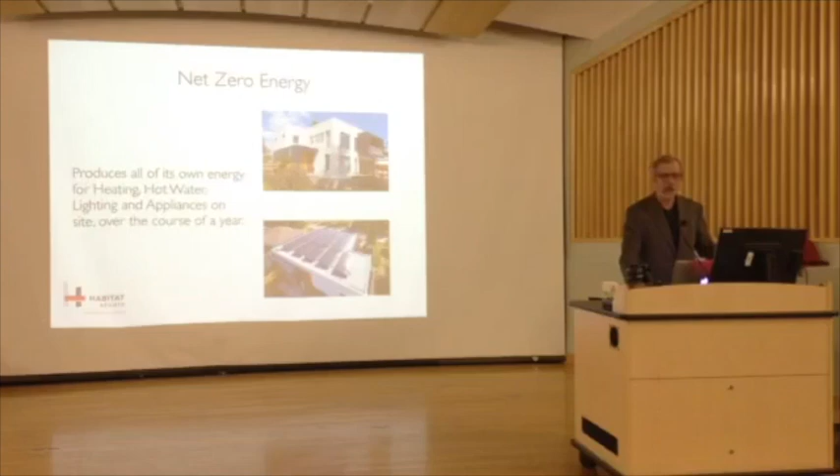Heating, cooling, appliances, everything over the course of the year on site. That means they produce energy in the summer when the sun is shining on the solar panels, and well, all year, most of the year anyway, and in the winter they're drawing it back out of the grid. The amount that they export and the amount that they import is about the same. As Rob said, we've done 11 of them so far.

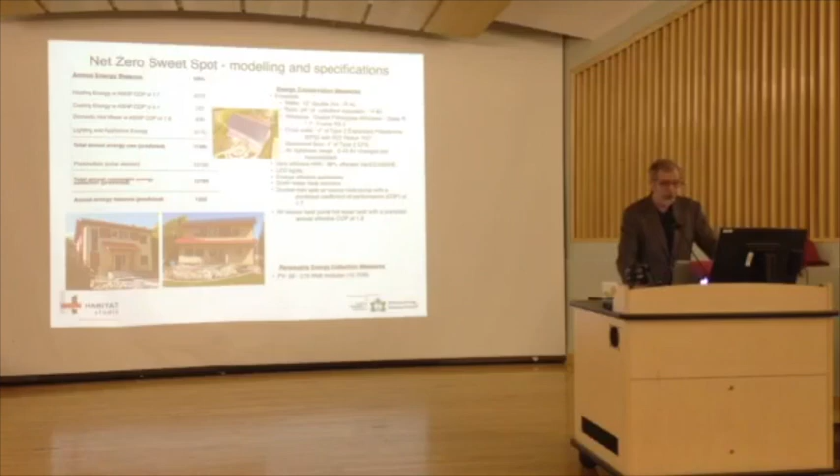Starting with this one that we built with Natural Resources Canada under their R2000 net zero pilot, it's producing a nice surplus. We think we've replicated that. We think we now have the recipe. So it's something like this.

It's an R40 wall. Does everybody here know what an R value is? Like when we say R values, anybody? I don't need to explain that. Okay.

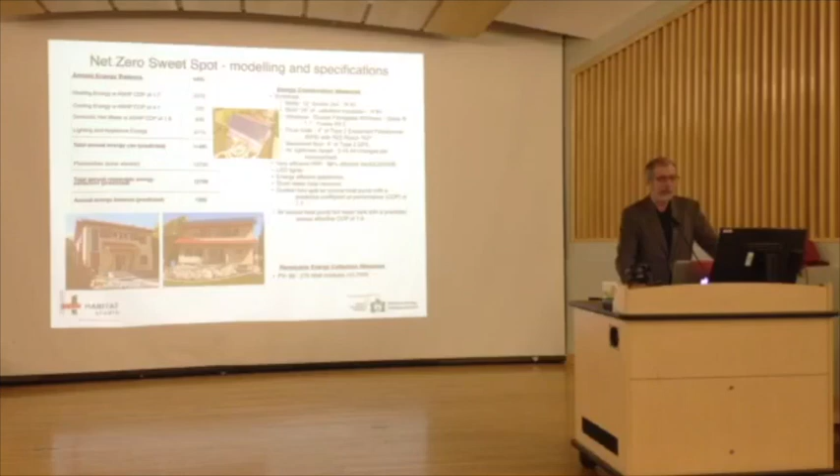So the recipe is an R40 wall, double 2x4, R80 roof, R37 frost walls, continuous insulation, about R16 under the basement slab, really good windows, and an air source heat pump and air source heat pump hot water tanks. We'll talk about that a little bit more.

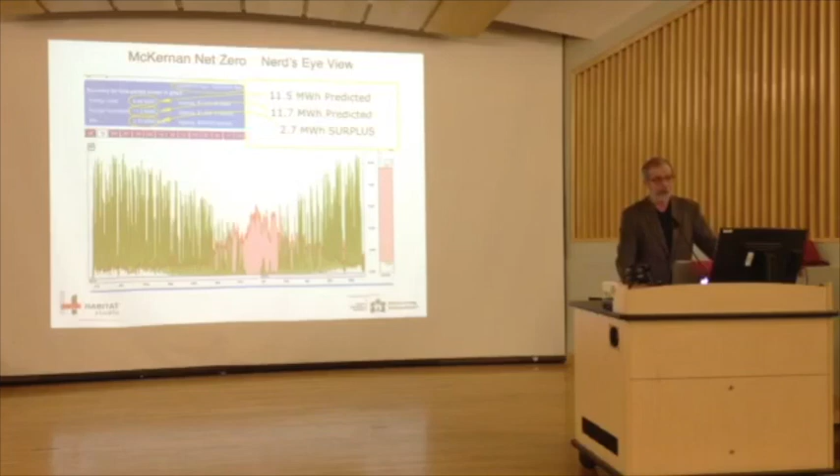And we now have 2 more that are using the same recipe that are net positive. So we're really confident that this is it, we've got it now. We can do this pretty much anywhere. So that's just a little bit of bragging.

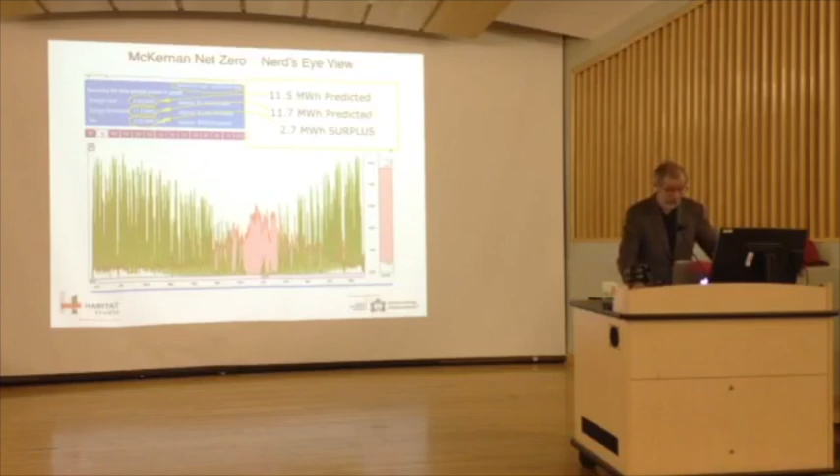Really, we're here to talk about this project in North Glenora. Rob was talking about a community - this is a community effort. The number of pieces that came together to make this happen is really quite amazing. So we started with...

...the neighborhood of North Glenora. It's a vibrant neighborhood, it's across the street. Our site was an old church hall and manse across the street from the school and the sort of big block - great solar exposure. The neighborhood has got lots of renovation going on, it's a kind of a, property values are going up, there's lots of new houses as well. But the school population was low, and the school was under threat of closure or consolidation with another bigger school somewhere else.

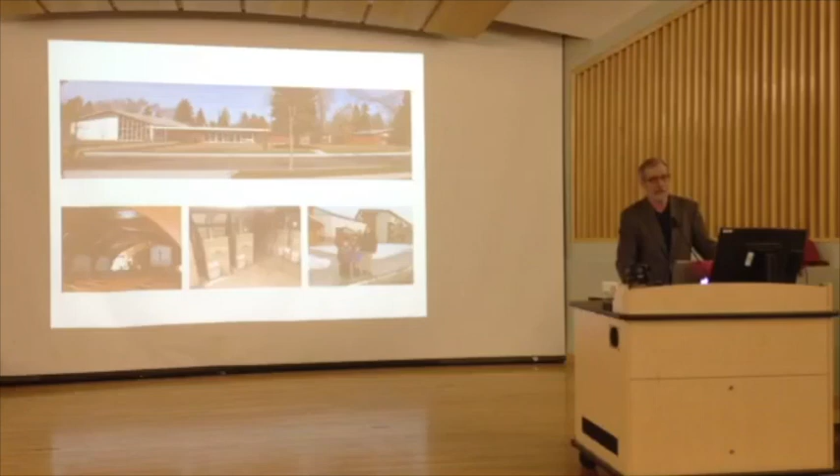So the congregation had 2 problems. One was even with the 7 furnaces, when it was cold, it was uncomfortable, and people are aging and have less tolerance for cold, and they couldn't afford it. The other thing was that they were looking after a family from Myanmar in the manse, with 5 kids - it's a 3-generation family, the parents live there as well. They found out through that how desperate the need for housing for large immigrant families is. So they set out to solve 2 problems.

They contacted the Right at Home Housing Society. It's a nonprofit housing society that's been building and operating housing in the inner city for about 40 years, and talked to them about how they could do something together, and Right at Home engaged us. I had been involved with them years ago - I was at their founding meeting, and in fact it's through them that I'm a partner in Habitat Studio. Ultimately, that's another story though.

So we started to design a project and we engaged with the community, and there were all the usual concerns like parking and traffic, and a little bit of NIMBY pushback, but the consultation was done really well. The community league president was very helpful, and it's a good bunch of people - like these folks are pretty woke, really. At the end of the day we went to council, and we also listened - we changed a number of things.

They wanted to be sure there was a space for a daycare - that was a big concern in the neighborhood. They also wanted to be sure the church was on the same corner it had always been on. So we listened, we did that, and we responded to the parking and traffic stuff as much as we could. At the end of the consultation process, the only people in the room at the council hearing were the community league president and the planning chair, and I was blushing - they were so effusive in their praise for the process and the project. So we had our zoning in 5 minutes, and Scott McKeen just about fell off his chair.

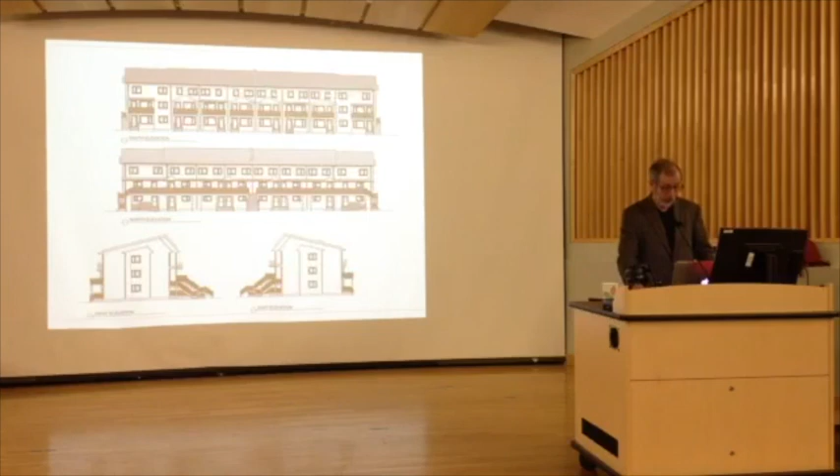So it's a stacked townhouse project - there are 16 units altogether, 4 5-bedroom units, and 12 3-bedroom units. The units are stacked on top of each other. The lower units have their bedrooms in the basement, and the upper units have their bedrooms on the 3rd floor, and the access to the upper units is via that bridge that you sort of see at the top.

They need all that space. In fact, when we originally met some of the families there back in the summer, there was one family looking for 2 units.

The 3-bedroom units have bigger bedrooms, so that the kids' bedrooms are big enough that you could have 2 in them, and lots of them do.

So from the outside, it looks like this. We tried to give this feeling of a pattern of a family of entrances, so that it was oriented to the street and just had a really good residential feel, being a fairly large building.

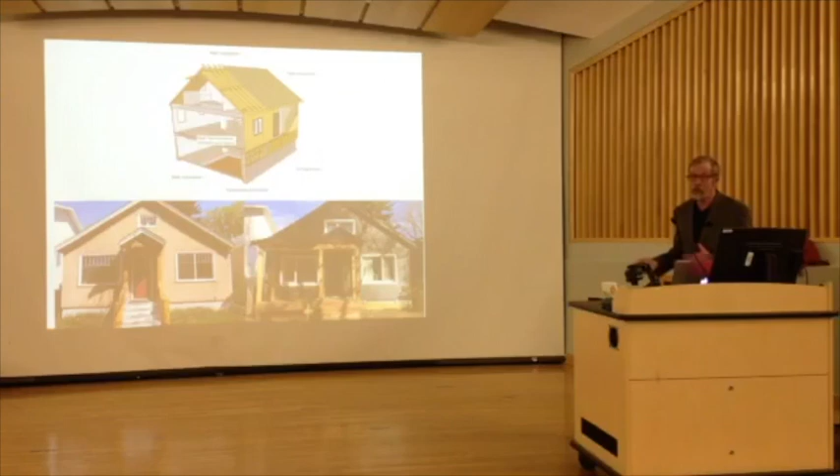With this deep energy retrofit, we've got to do this. But this is kind of what we have to do, and we've got to do neighborhoods of this too.

I wish I had a picture of Calgary, because the way Calgary's laid out, when you drive through on the Stoney Trail, it's like there are billions of houses in Calgary. You see them all because the hills roll up and show them to you. That was the closest I could get for Edmonton.

But we've got to fix those, and they're only like 20 years old, so the windows don't need replacing yet, nor probably does the siding. And we've got to fix all the old ones downtown. And we've got to fix these ones that aren't even finished.

So just to go back to that, taking you through it: somehow we're gonna do this. We're gonna start taking the buildings we have built today and start retrofitting them, and there's some hopeful possibilities in that regard. I'm assuming we're gonna start ramping up net zero buildings really fast, and that from 2030 on, that's all we're building, so we're not adding any more to that. But then somehow we're going to have to fix these ones we just built and are still building. I have no answers for that.

So that's all why we need to build houses like this right now, because we just cannot add to that list. That's too much work already.

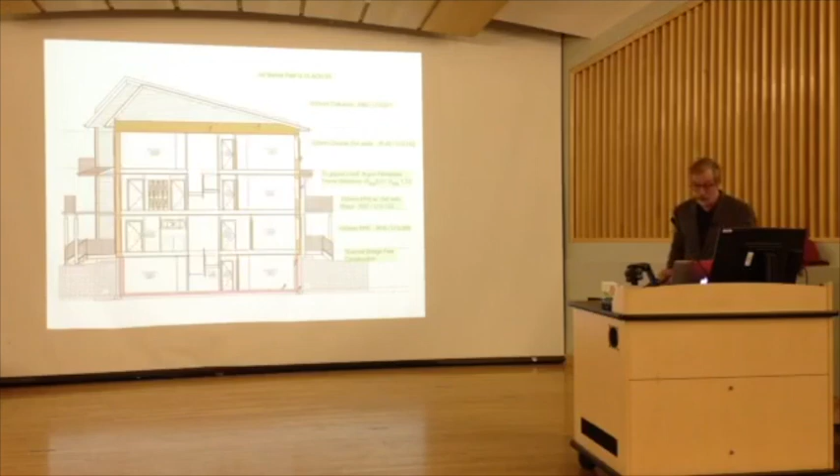And so now I'll take you through just a little bit about how we put this together and the attention that got put to various details.

We've got thermal bridge-free construction, so there are no places in the entire envelope where there's anything but insulation between you and the outside. Anytime we've got any sort of structure, there's a few little bits of subfloor and that sort of thing, but for the most part there's almost no thermal bridging there.

These footings down here, where the dividing walls and party walls are going to go, are actually wood boxes with insulation in them. So when we put the insulation under the slab, they'll butt into that and it'll be completely continuous. The insulation on the floor butts right into this insulation here, and that goes up, gets filled in, and gets continuous with the walls above. So it's pretty much thermal bridge-free construction.

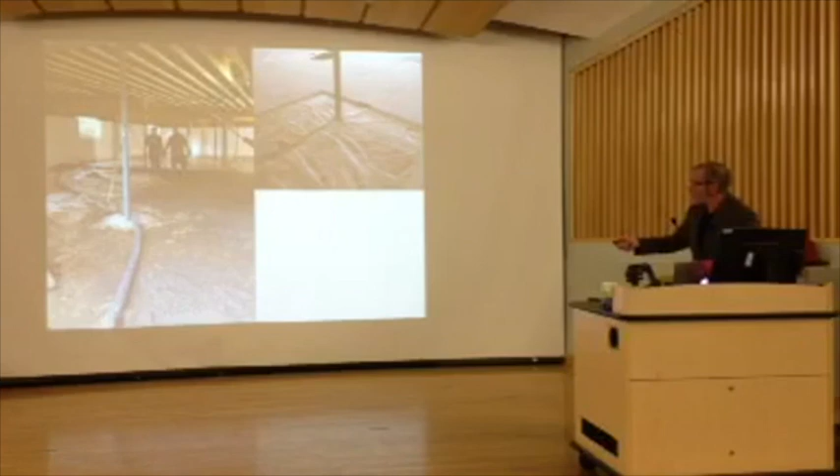You can see here we've got 2 layers of styrofoam under the basement floor. We've got poly, like a poly air barrier, in between those 2 layers, so that's sealed. That gets wrapped up the wall here so it can tie into the other wall poly eventually. So it's continuous airtightness, with lots of care and attention on the detail.

Because we delayed the framer so long, he actually prefabbed the walls in Red Deer, and that worked out quite well. It meant he wasn't taking up space on site, and we were able to do other things. He brought up about 5 truckloads of walls - they add up pretty fast when they're 12 inches thick. So while we were building away on the church, he was dropping this stuff off and getting ready - there's a wall panel there being swung into place.

It's our typical 12-inch double wall - 2x4 inside, 2x4 outside, and a gusset to hold them together so the pressure of the styrofoam doesn't push them apart. We also get a lot of extra strength. This building was built with double 2x4s on 2-foot centers, even on the walls that had 3 stories above them and carried the roof. So it's very, very economical.

And our usual fussy poly details - I'll talk about that a little more in a sec - but the same kind of thing where we back up all of our joints with polyethylene and tape stuff and lots of acoustical sealant. It's a recipe that's been working very well for us on our single-family houses. We're aiming for an air tightness of 0.6 air changes an hour.

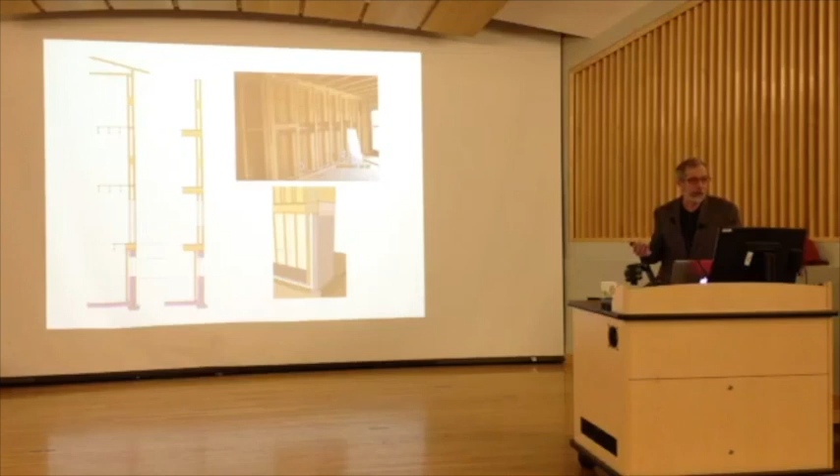One of the places where I think we're getting leaking is actually this spot right here. When we went around with a smoke pencil, we could find it leaking there. That would have been easy to seal. Our insulating guy who was doing that sealing didn't understand that, and by the time we were testing it, we had flooring in a lot of these places, so it was hard to get down there to really do much. We did the best we could to fix that, but what a lesson.

We get way better results than this on our houses, and we should have gotten a better result here, because the ratio of external area to floor area is so much lower that it should be easier to hit the target. In fact, the U.S. Passive House standard recognizes that, and they make you measure leakage per square foot, which at this size of building turns out to be about the same. But as buildings get bigger, you have to get them tighter.

There's a couple reasons for wanting that tightness: any air that's leaking out has got humidity in it, and as it's going out, it's reaching a point in the building where it can be almost as cold as outside. As it travels out through that crack, it cools down, and as it cools it drops the moisture - you can get frost, and actually quite a buildup. So it's not just an energy issue, it's a durability issue as well. But we've got a safety margin here with the cellulose, because it's continuous through the whole thing, and if you get a little concentration of moisture in there, it acts like a giant sponge - it wicks it throughout the mass where it's pretty much harmless and can diffuse slowly out the rest.

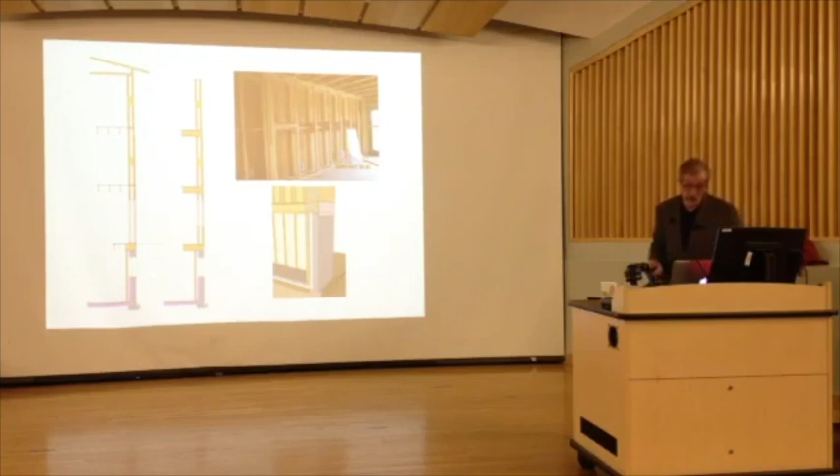We also recycled a bunch of wood - all of the wood in the church actually is reprocessed. We built the front doors from it. We took leftover glulam arches and made that nice welcoming entry canopy. The front doors are like 4 inches thick, triple weather stripped, with R12 insulation in them. We tried to make passive house doors - that was kind of a vanity thing, just a weekend project.

But we're still fiddling with the automatic opener with the 3 layers of weather stripping.

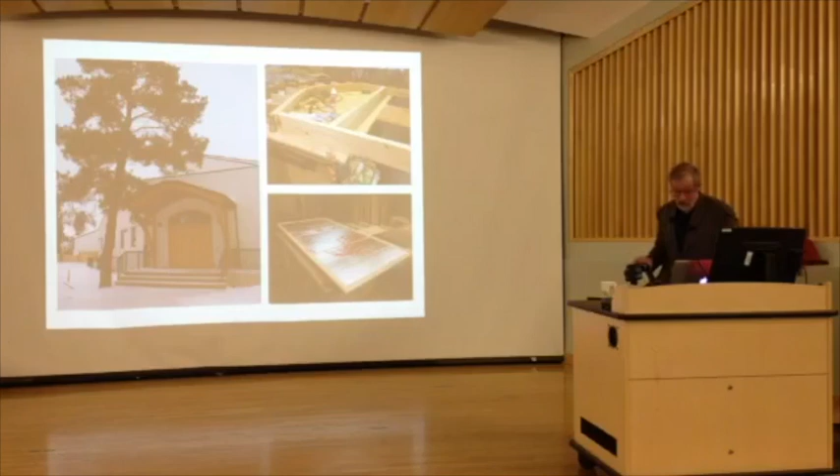For the same reasons people worry about long-term costs, we were really careful about making the building durable and low maintenance. The siding is Hardie siding, and we used building paper so that it would be vapor open, so any moisture that does get in the wall can dry through it - it's better than Tyvek in that regard. We've got rain screen battens, so there's an air space behind the siding, so the walls can dry if they ever get wet from either side. We're actually doing this on all of our projects now - it's not that hard, and it's required in BC and on the coast.

Then there are other little details - we have these timber balconies. We were very careful about how we flashed them, because wood will last forever if it can dry. So we've got no places that can really trap moisture, and when they do get wet, they'll dry quickly and hopefully maintain that.

We did a kind of cool thing with the balconies here - these are precast concrete planks that we made ourselves, made while we were waiting for the geothermal drilling and some of the other stuff to happen. So we've got our structure, our wear layer, and our waterproofing all in one piece. That's really tough.

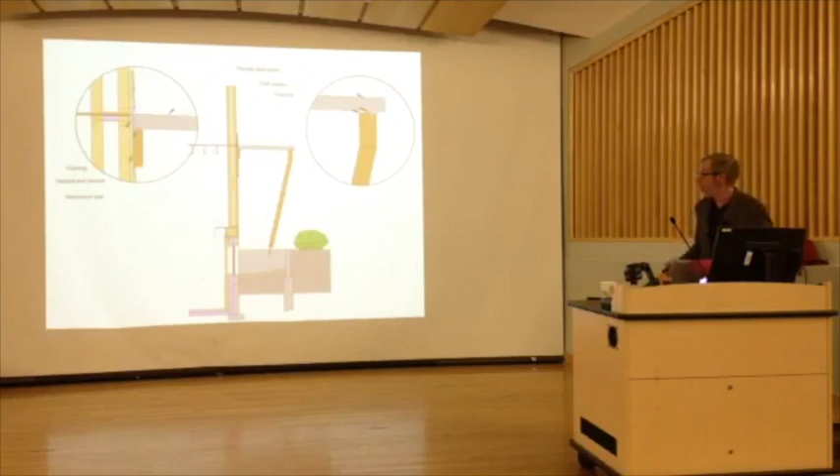I told you we just used our recipe on this building. Was it the right thing to do or not?

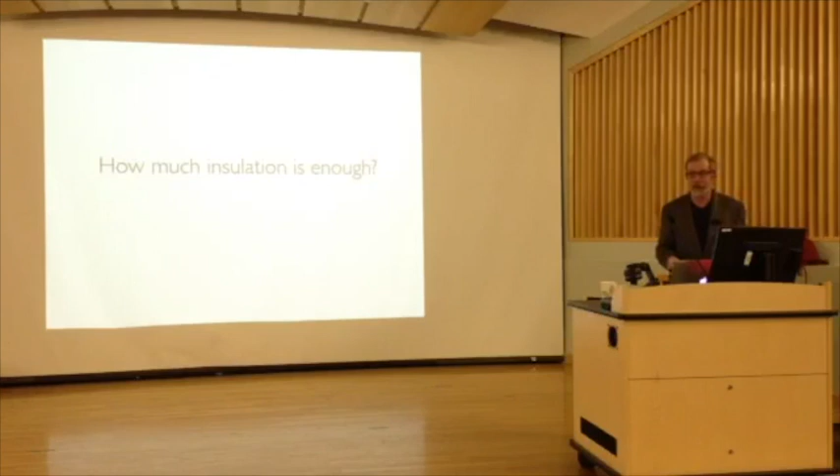When you're trying to figure out how much insulation is enough, the way you go about it is to figure out how much it's costing to add more, and how many kilowatt hours per year you're saving with that extra money. So you can always reduce that decision to that.

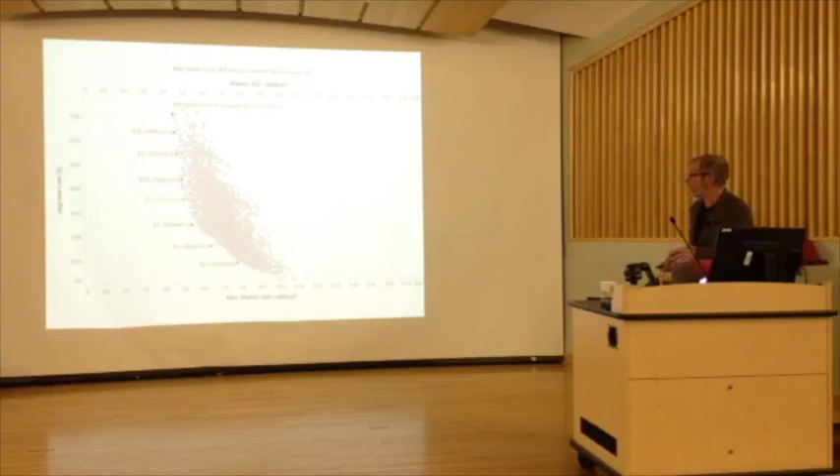I'll give you an example here. This is some work that Natural Resources Canada did with a database program called Tableau, I think, where every point is a solution that's a cost for an upgrade, and on the bottom it shows how much energy per square meter that building is using. So obviously you're going to do the cheap ones first and then go up the chain, and that's really what drives these kinds of decisions.

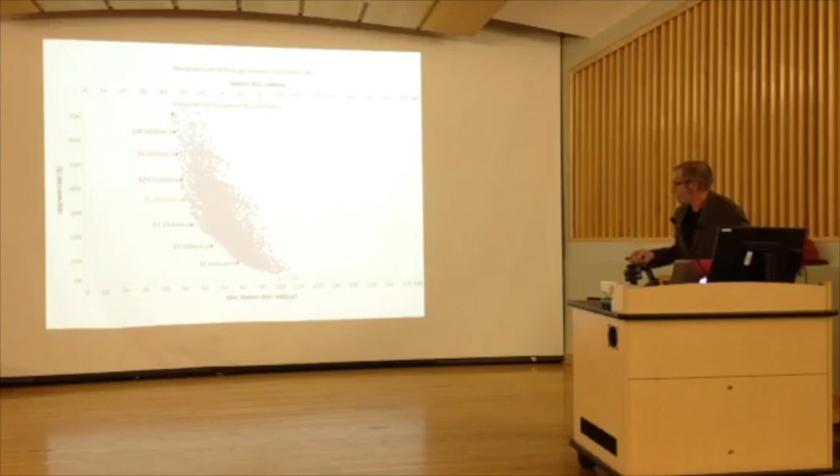So for example, this is looking at the cost of the insulation under the basement slab in the church. We started with R16, and that's where we stopped.

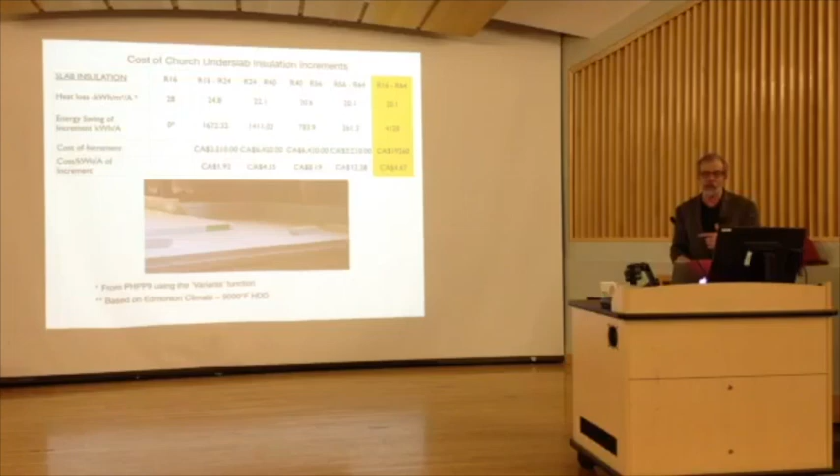Then we said, because we were academically interested, what would it take to take this building to the International Passive House Standard or the U.S. Passive House Standard? The two standards are different. The U.S. one is climate specific, and these buildings meet it easily. The international standard we don't meet, but I was interested to know what it would cost us to do that.

So just looking at that, we started with R16, and all these numbers come out of the software that is required for testing passive house compliance. It's called PHPP. It's a humongous Excel spreadsheet.

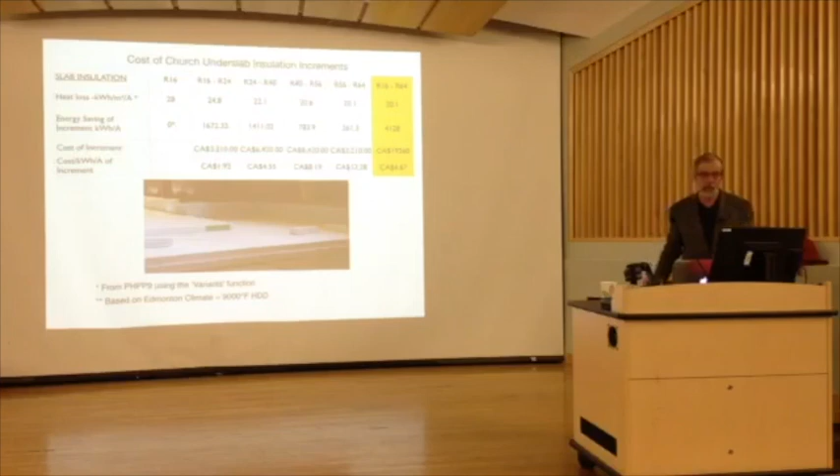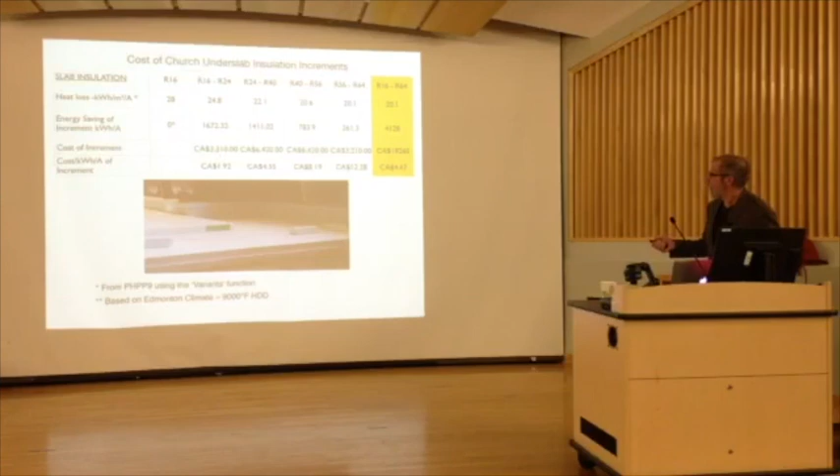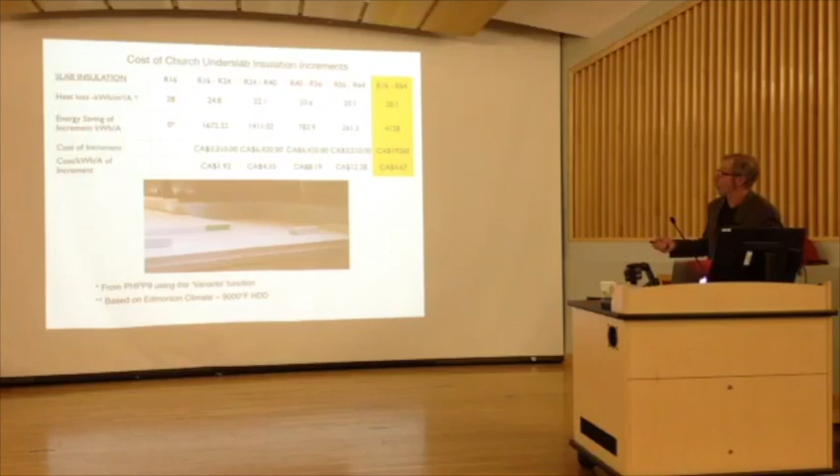So if we were to go from R16 to R24, that's just another 2 inches. The building would go from 28 kilowatt hours per square meter per year down to 24. We'd save a total of about 1,600 kilowatt hours a year, and it would cost us about $3,200, at a cost for that measure of $1.92 per kilowatt hour, which is not bad.

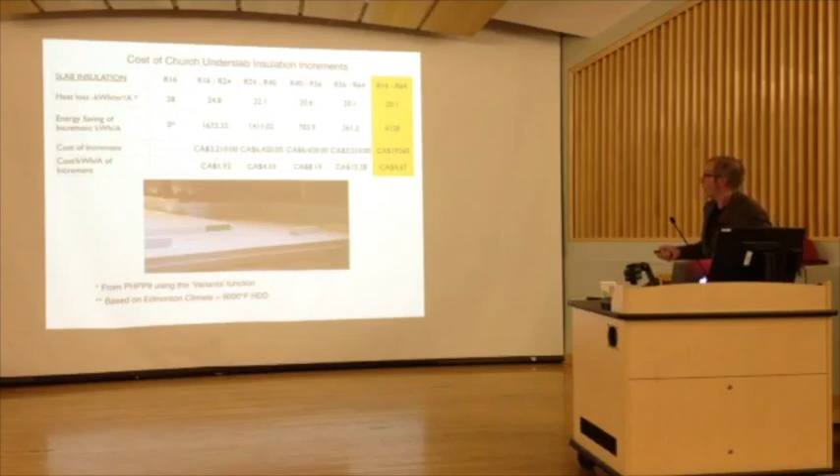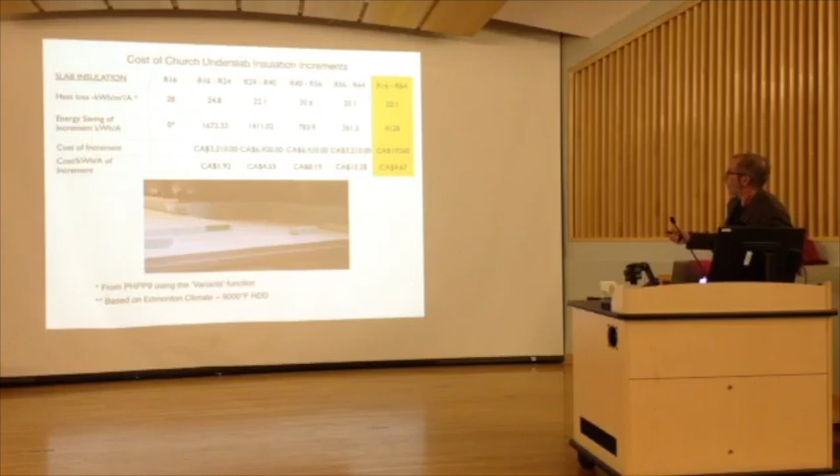That's reasonable. But as we go up, we kept dialing it up to try to get to compliance, and we had to go all the way up to R64 under the basement slab to get it to passive house compliance, and the last step was going to cost us $12.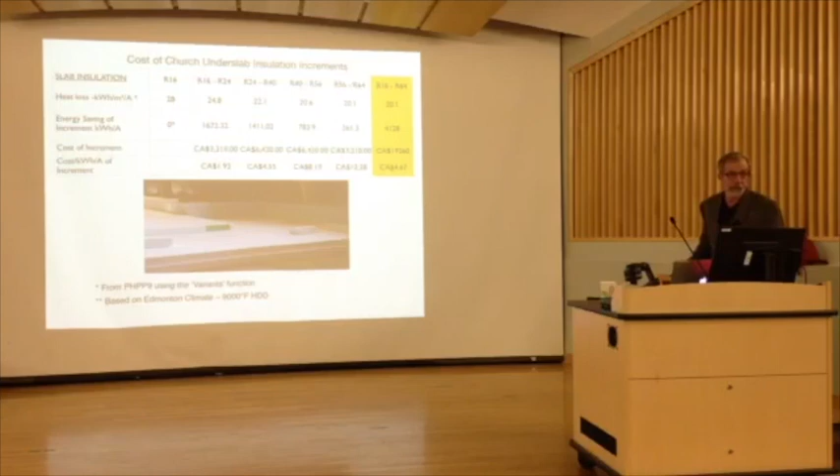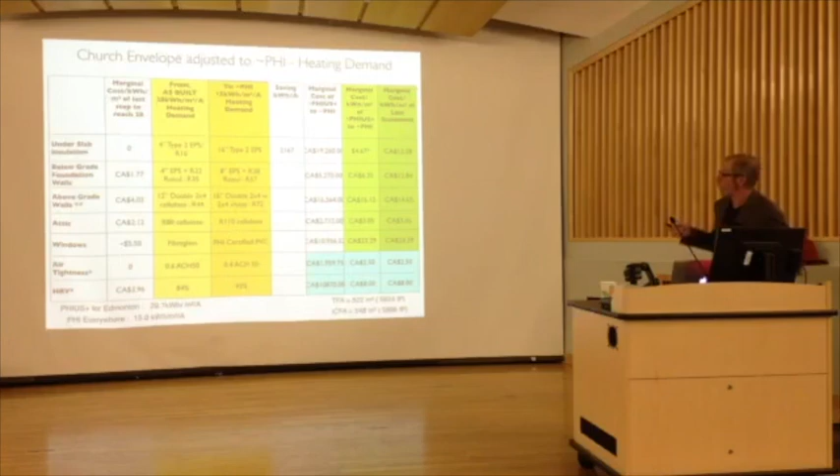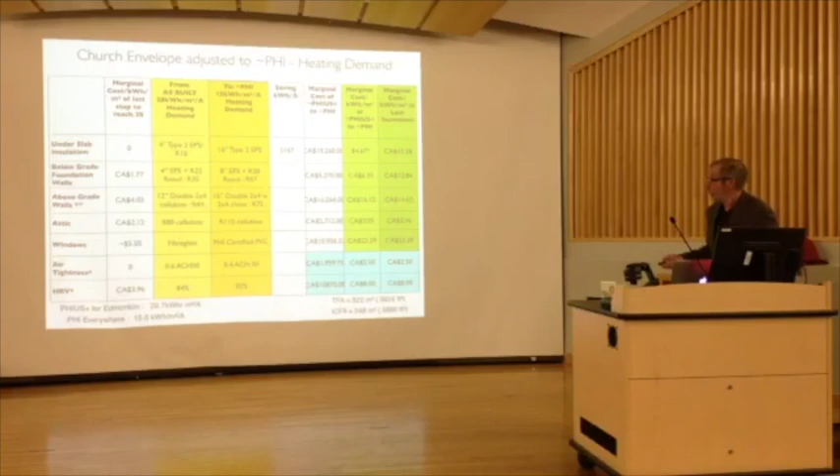And we did that for the whole envelope. So this column here is where we started and what it costs to get to the step that we stopped at. You can see we're in the range of $1.77 for the slab, about $4 for the walls, $2 for the attic—that's always going to be an easy one—and $5.50 on the windows.

Windows are expensive. And then to get a good HRV is about, for every kilowatt hour a year it saves, about $4. You've got to do it, so it's not optional, and airtightness we were just going to go there. You can see I still have my optimistic number in here.

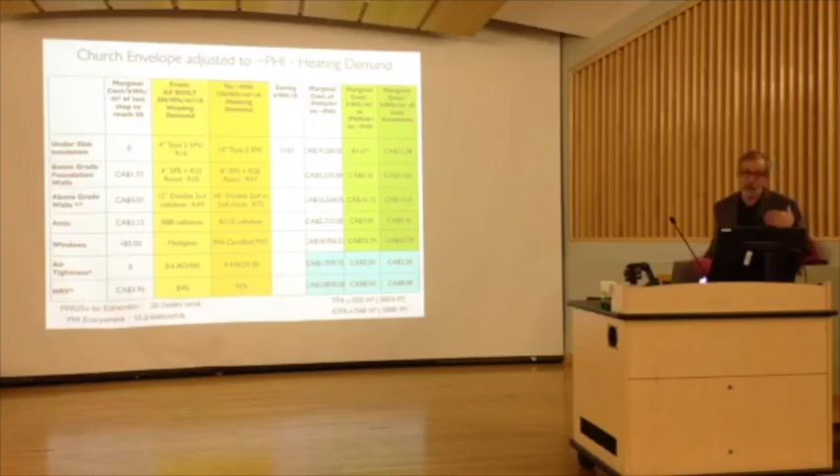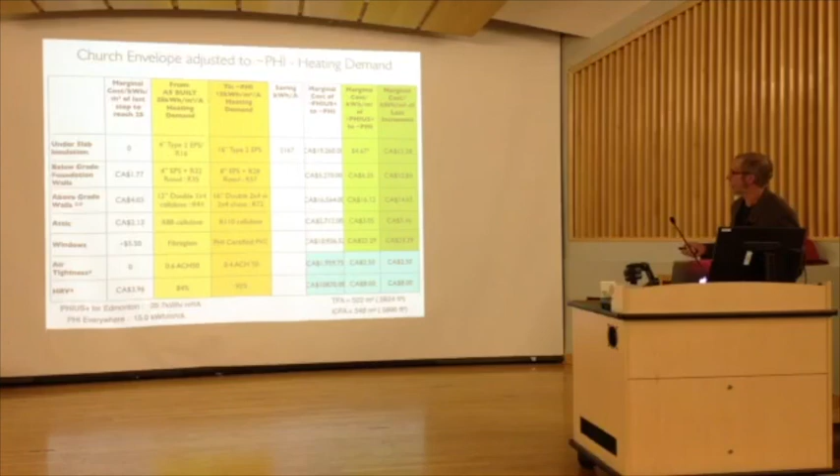So then we dialed up the specs to get that building compliant to the International Passive House Standard. So we had to go up to— is that right? I think that's a typo. Yeah, it says EPS, I did this a little while ago. No, that should say whatever I had on the last sheet there. Yeah, no, that is 16 inches. It's insane.

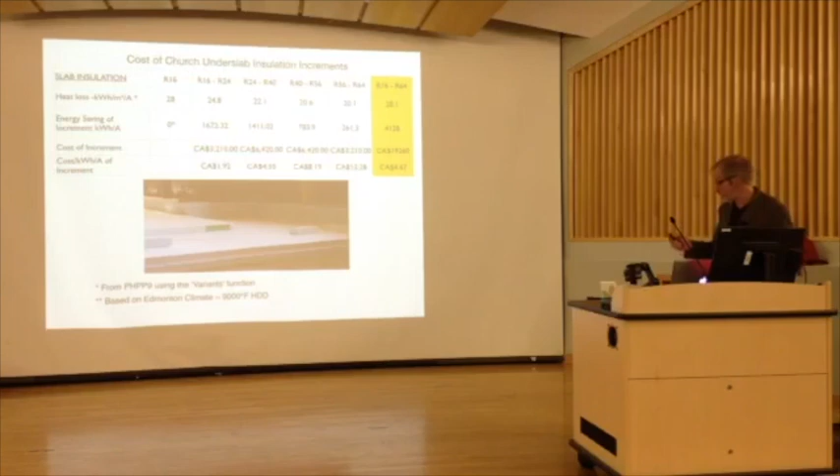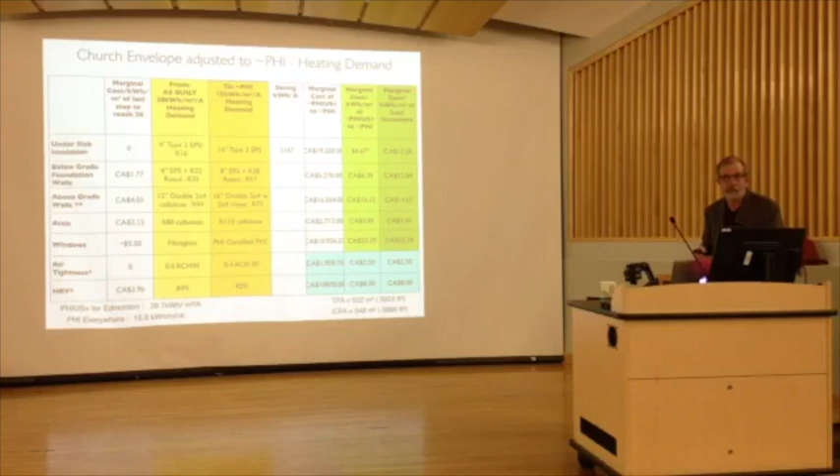Well, the difference between PHPP—one of the differences—and the modeling software we use is that it's a static calculation, and that's not how it works in the ground. HOT 2000, our more commonly used software, actually uses dynamic calculation to do it. But anyway.

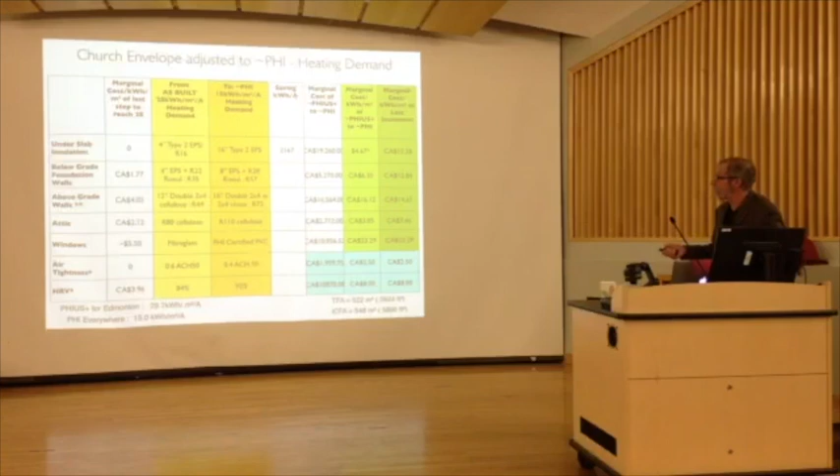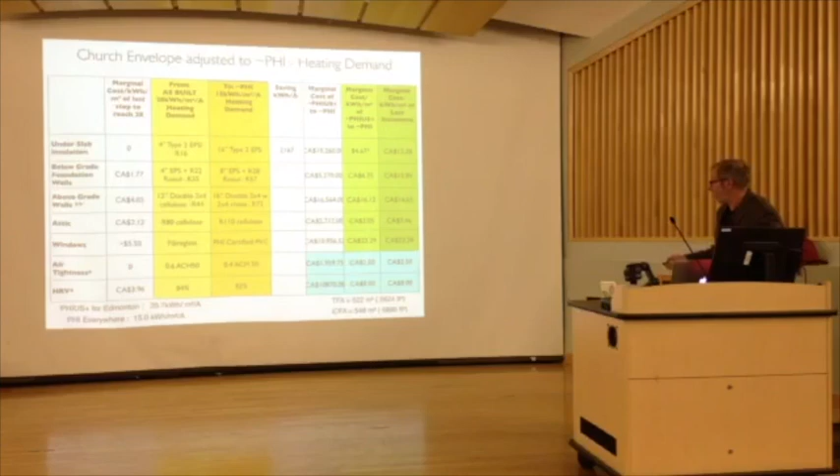So then we were upping the basement frost walls to R57. Our walls went up to R72, so we had basically a 20-inch wall, R110 in the attic, certified passive house windows, and they're costing like $23 over the ones that we used. You can see these numbers are getting pretty big, and that's really why we didn't do it.

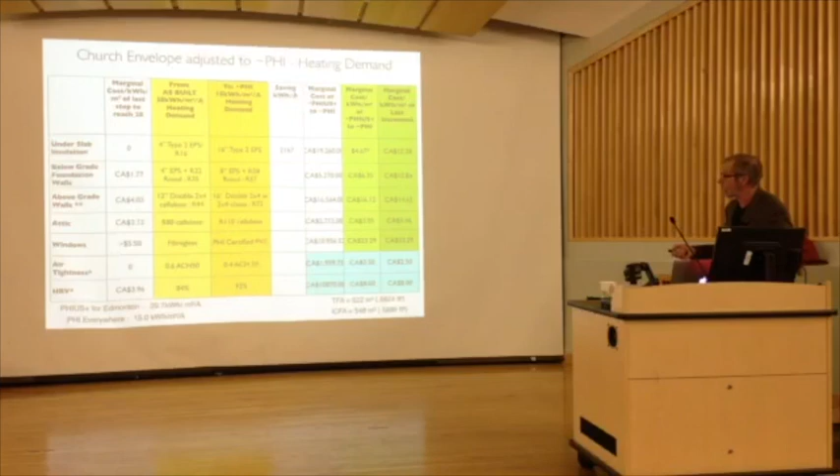And the total savings were not that big. We assumed, optimistically—and I think we could have done it, like building with an inside double wall with a 2x4 chase—we could have gotten it to 0.2 or 0.4. I'm pretty confident of that.

So all this—I looked at this, and this building, as we built it, the church, is using about 28 kilowatt hours per square meter. It meets the U.S. Passive House Standard. It's a darn good building. It's net zero energy. The townhouses with exactly the same envelope are at 15.3—they're a whisker from passive house compliance.

But a square foot of insulation in the townhouse is doing exactly the same job as a square foot of insulation in the church. It's stopping just as much cold. So I'm still trying to wrap my head around it. The question is, is it reasonable to do these buildings on a per square foot basis, or is there another metric?

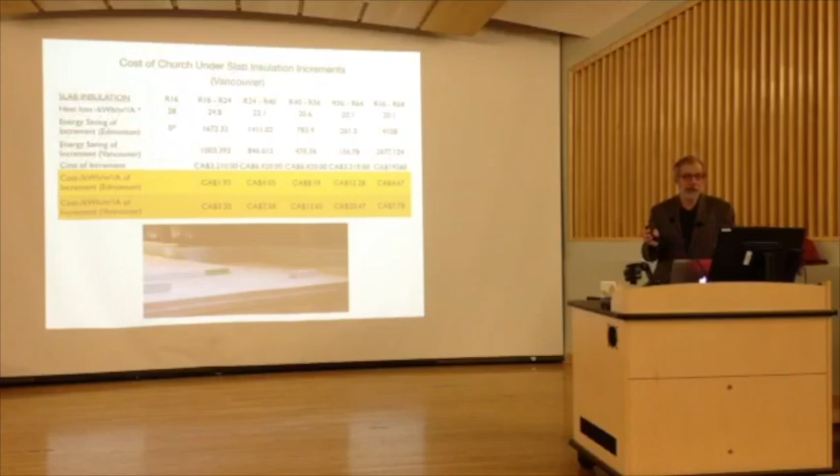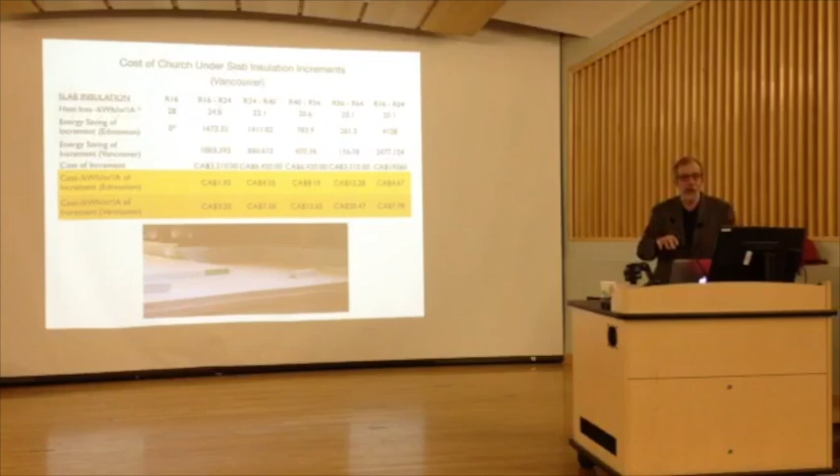I mean, just in case you're familiar with how much passive house construction is going on in Vancouver, I see it there, and I think this is exciting. Don't get me wrong when I say I think every passive building that gets built is wonderful. It's just that we need to, this is such a big job, and there's so much of it to do, we need to make sure that every penny we spend is doing as much as it possibly can.

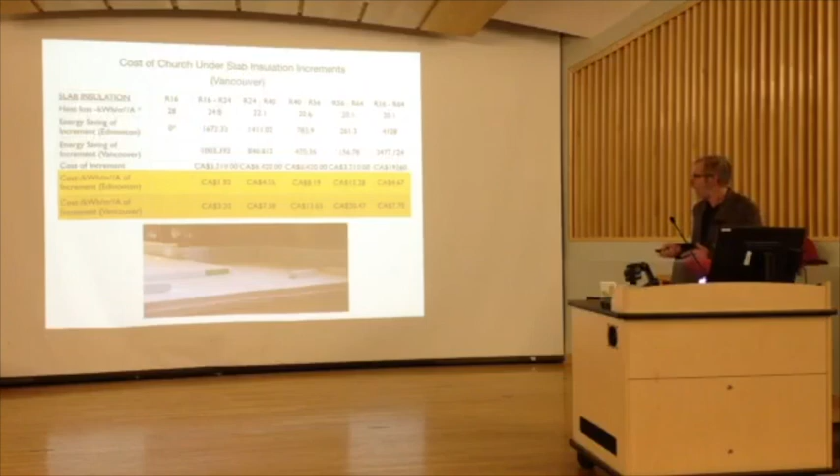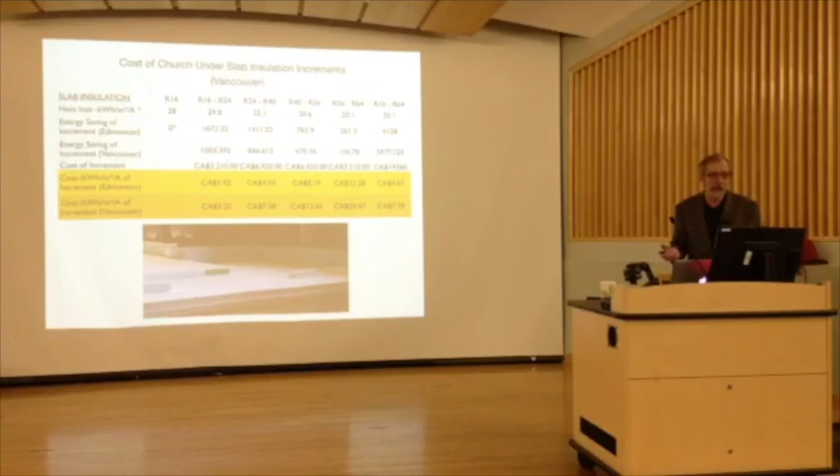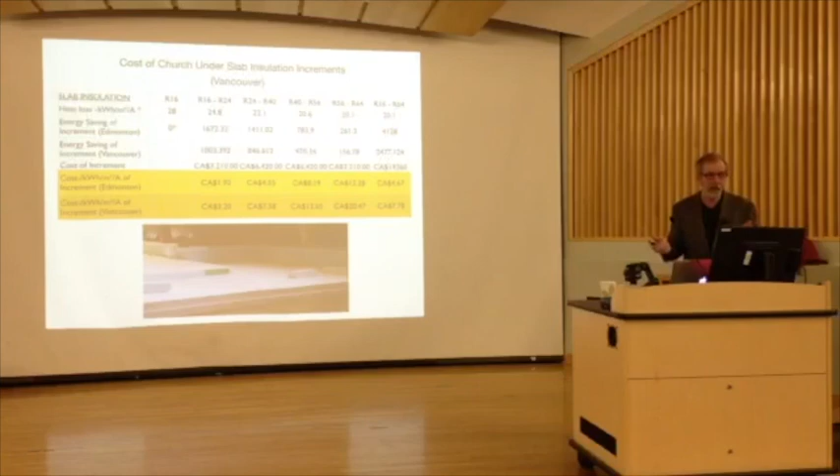So just out of curiosity, I changed the weather file to Vancouver, and it actually gets worse. It's more expensive. And I see Godot here scrunching his brow, and it's because it's just the shape of the curve. You hit the flat spot on the curve faster with fewer degree days. So I don't know why they're doing it. More power to them. It's great.

Anyway, so we did all this energy efficiency stuff, and my mandate was just to design an energy efficient building. There was never any discussion about net zero energy. But looking down the road, I thought we need, like it's just a bad habit.

I figured out, I did the energy modeling anyway, and figured out that to get enough room, we were going to need as much room for PV as we could possibly get. So I just drew the roof that way. And somebody said, so what's with that? And I said, well, so it could be net zero someday. And they said, we can do that? And that was all the encouragement I needed.

You know, I feel a little bit sleazy about it, but not too bad. So there was no master plan. This just, we ran the numbers and did some costing on the buildings this way with net zero energy. We did the costing on the building, but somebody did a pro forma on the whole project. And they said the numbers were within range, and they had a donor step up to pay for the PV system, and so it was just full steam ahead.

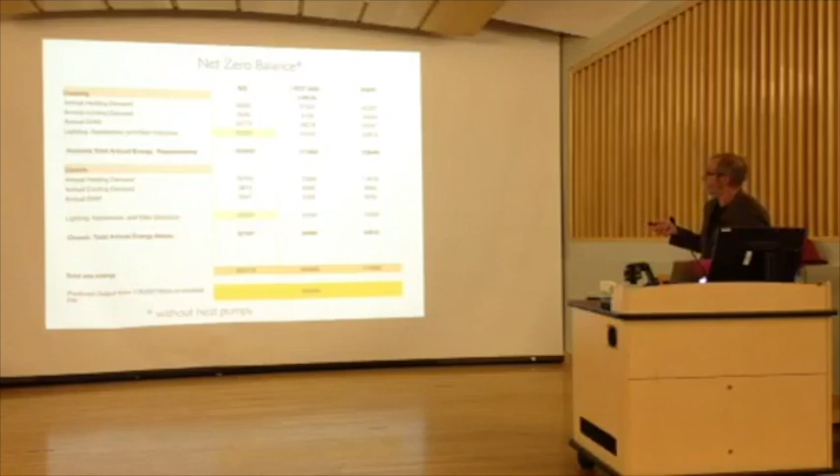HOT 2000 and PHPP are very, very similar, and IES are very similar, but PHPP shows that we're using, because it's more thorough, a little more heating. But look at this number here compared with, we use default numbers from NRCan, these numbers down here. They're using 50,000 kilowatt hours a year for 16 families. The average Canadian family uses about 8,000 kilowatt hours a year for just lighting and appliances. And on a multifamily, with efficient appliances, you can dial that down to about 5,000.

So we use that 80,000 number, that's what Stuart used. They use 50,000, which is the maximum the passive house software will allow you to use. The rule is you damn well are not going to heat your house with your TV. You're going to somehow get your lighting and appliance loads, and that is not going to turn into house heat, where in fact with real families with real appliance use, even with energy efficient appliances, that heat is there. So that's why this number is low, that's why their total is low, and that's why this number is higher, because they're not calculating so much waste appliance heat heating the house.

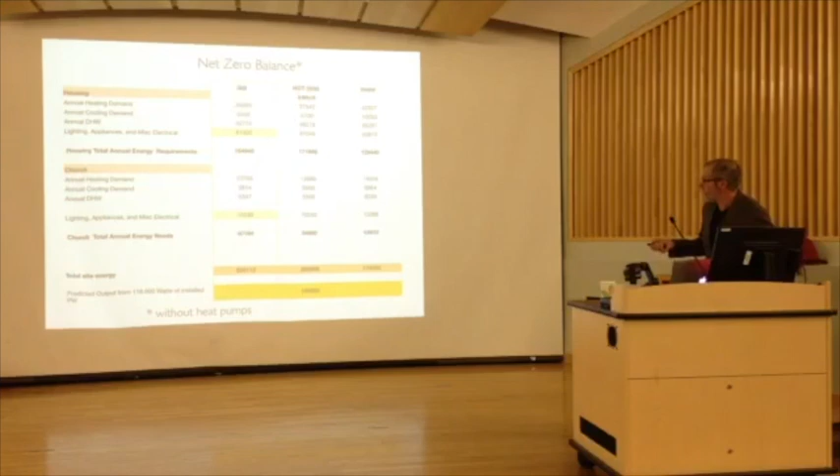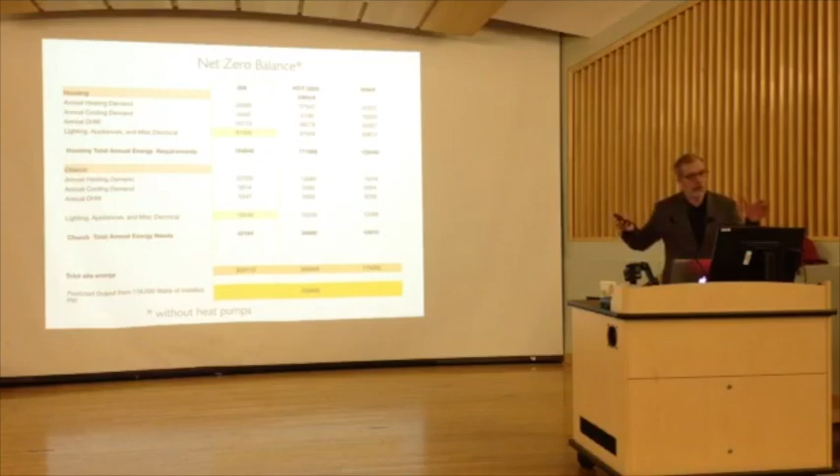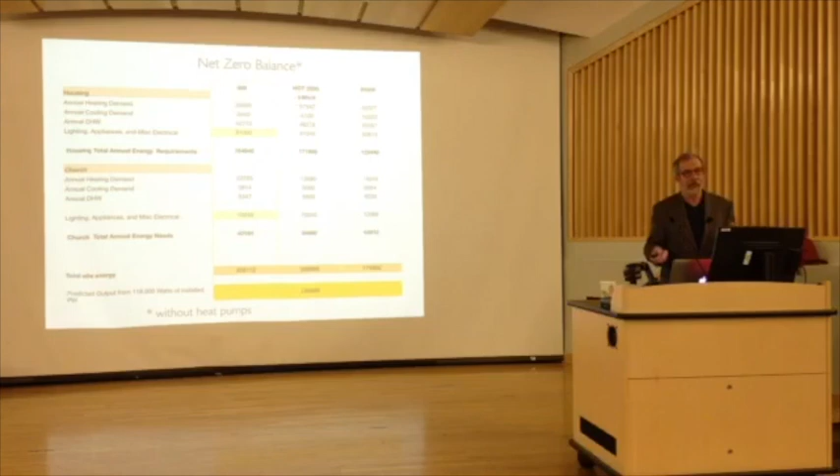So if we add this up for the whole building, we're looking at 205,000 kilowatt hours a year we need for it, but we've only got enough space on the roof for 135,000. So we're not going to be net zero energy if we heat it with just electric baseboard. These units, the inside units, they're using 1,740 watts when it's minus 30. So that's like a hairdryer and 200-watt light bulbs. So you're going to put in a big geothermal system for that? Well, it turns out we are.

So that just kind of shows you it's full. That's what we ended up doing. That's the amount. We could not get any more on there.

So we did the geothermal system, and it turned out to be really a wonderful thing to do, and actually not as expensive as you would think. If we had left it with electric baseboard, we would have had to put up the capacity to generate another 75,000 kilowatt hours a year. At say $2, that's like $150,000 minimum. So instead we put it into the ground and didn't spend that much more.

It also solves a problem, because the elephant in the room here is that we're generating all this electricity spring, summer, and fall, and we're using a lot of it in the winter. That's fine when we've got a few buildings, but what happens when we have thousands of them? We're going to be telling utilities we need more capacity in the winter because all these loads used to be met by gas. And then in the summer, we're going to say we want to sell you electricity. So the more you can reduce that seasonal imbalance, the better.

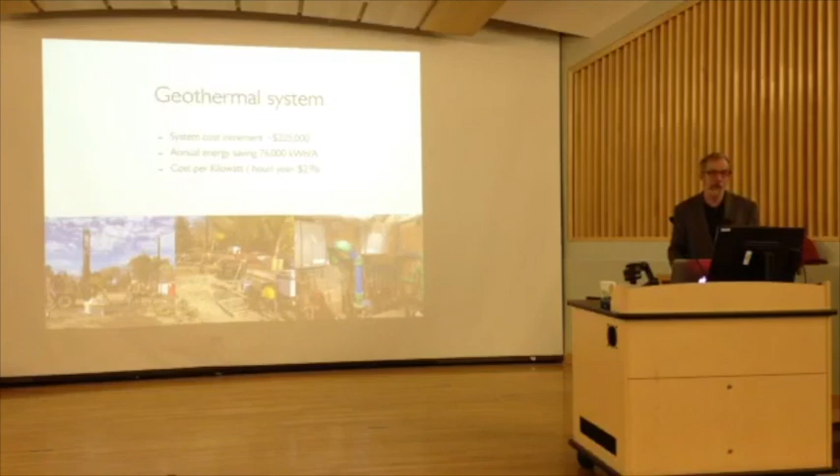And the geothermal is great for that because we're getting 3.5 units of heat for every unit of electricity that goes into it. And that was fun. Thomas is here from New Energy, they did that. I'm going to talk about that a little bit more.

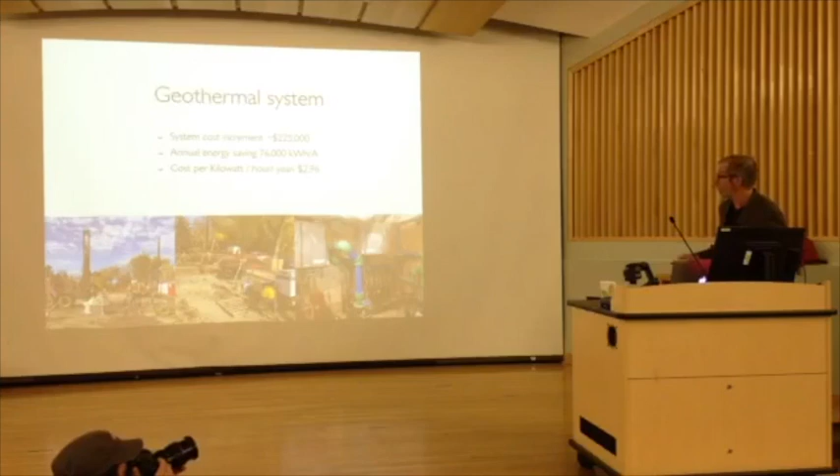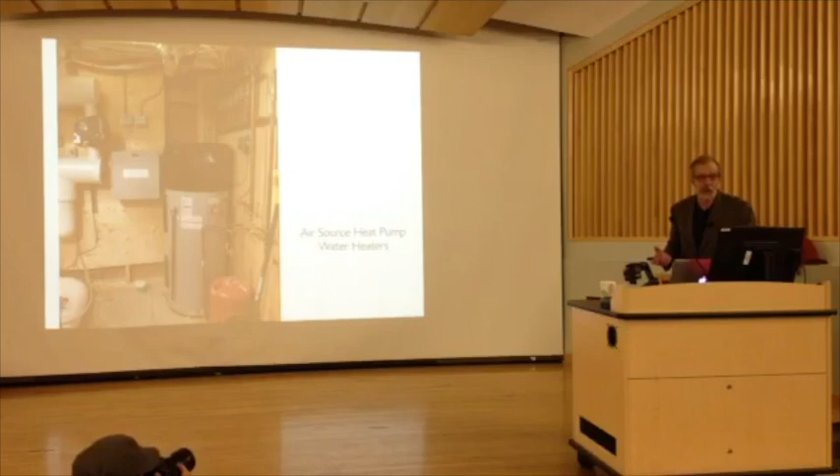So the other part of the next biggest number was hot water. These are air source heat pump hot water tanks, and they basically heat your hot water by cooling your house, which is, is that what we want to do in January? But when you put it all together in a system, it works.

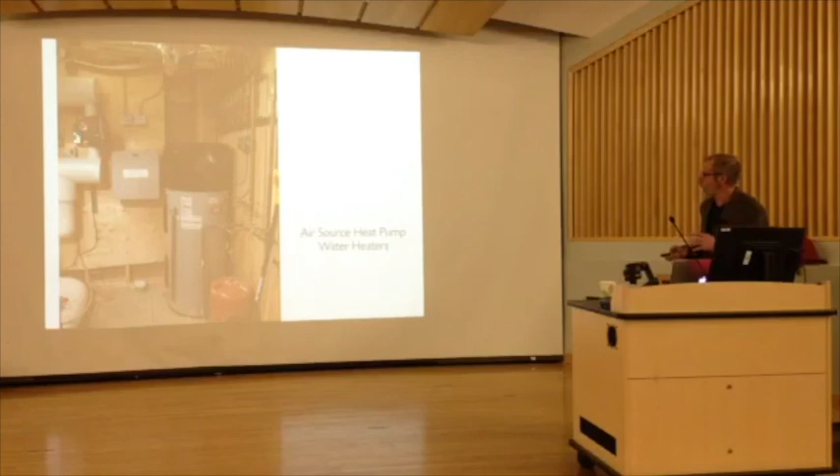They cool the - this is in the mechanical room of the church, and it cools the mechanical room down there. But the geothermal system gets that energy back with a coefficient of performance, so 3 units of heat for every unit of electricity. So the whole thing turns out to work really well.

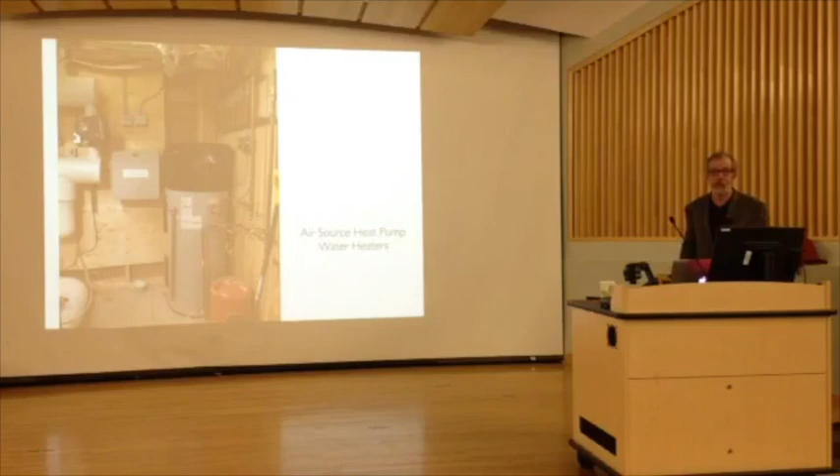We've got these going in single-family houses, and they work great. They really like being in the same room as a freezer. The waste heat from the freezer helps the hot water tank, and the hot water tank means the freezer doesn't have to work so hard.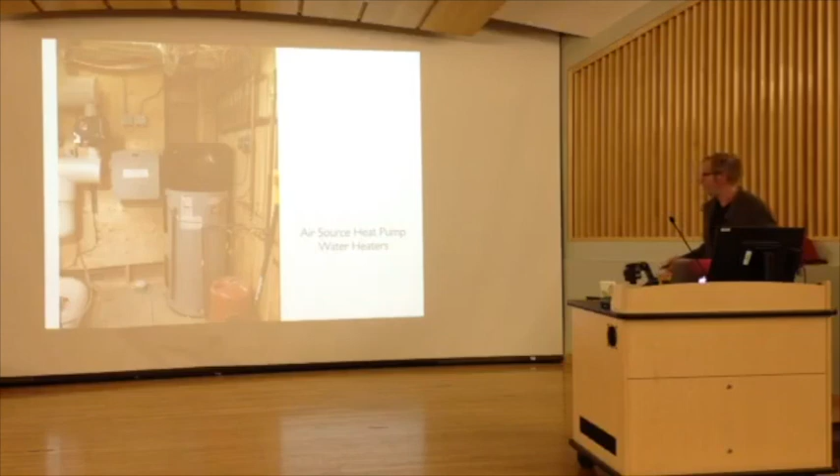So this is kind of our schematic, the mechanical room is beautiful. I don't know if you like those kind of things, but they did a gorgeous job of insulating them, and it's all nicely laid out, even though I didn't give them a fraction of enough room.

You don't see any flowers in there. Yeah, okay.

But the way it's working in the suite is that because we've got tiny closet-sized mechanical rooms, the way the system is actually working is - there are 33 holes.

We pump a mixture of water and glycol down in there. The temperature down there is about 6 degrees. Anywhere on the planet, the ground temperature for the first layer of hundreds of feet is about the same as the average annual air temperature, which kind of makes sense.

So we pump down water, it comes back up at 6 degrees. The heat pumps cool it off to about -5, -10. So it cools that water, and the energy essentially sucks the heat out of the water to cool it. That's what cooling is, and uses that heat to heat the space.

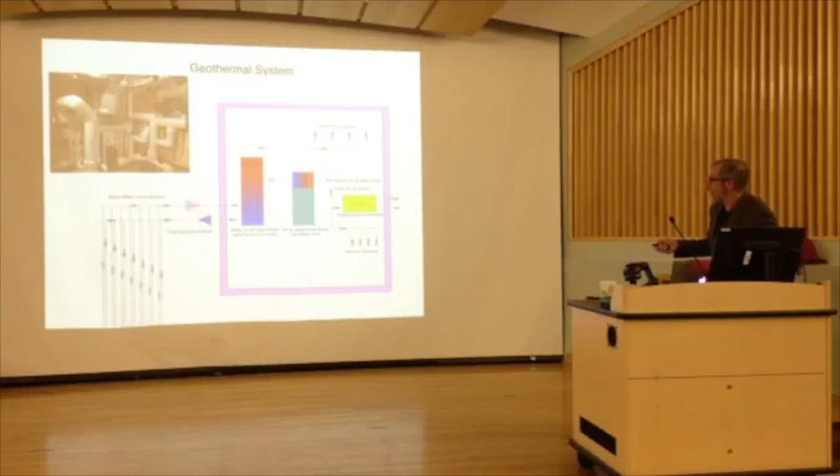But to deal with the air source heat pump hot water tank, we bring the return air through the top of the hot water tank so that cold air gets heated by the heat pump.

And then we got this other little innovation here. The mechanical engineer wanted us to ventilate the church and the daycare, with enough capacity to have the daycare full of kids and the church full at the same time. That would have meant adding at least one more HRV and one more heat pump. So we managed to convince him that both spaces would never be occupied at the same time at capacity. So we've got this ducting system whereby the fresh air can be directed either all to the basement, all to the daycare, or all upstairs.

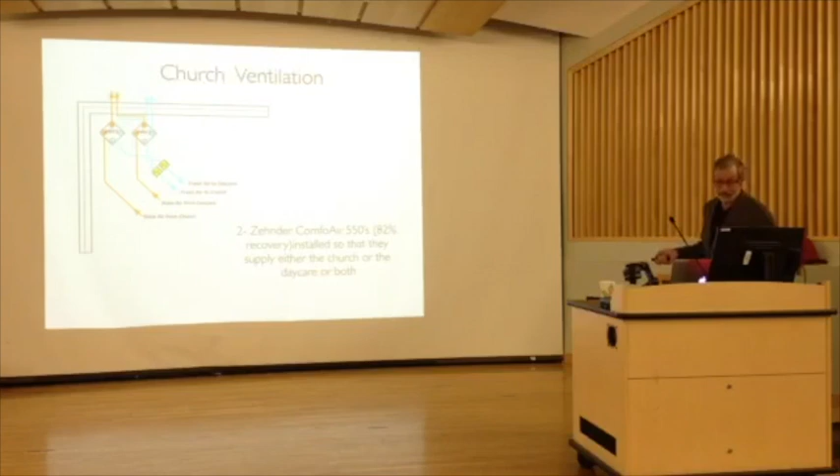And then after we add... oh, I got the wrong slide. Wait a minute, what's going on here? Oh yeah, I know, okay, this is right. There we go, this is right.

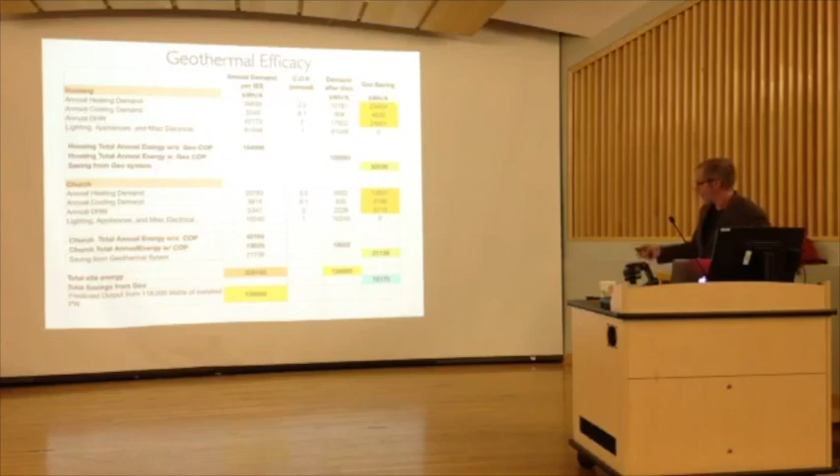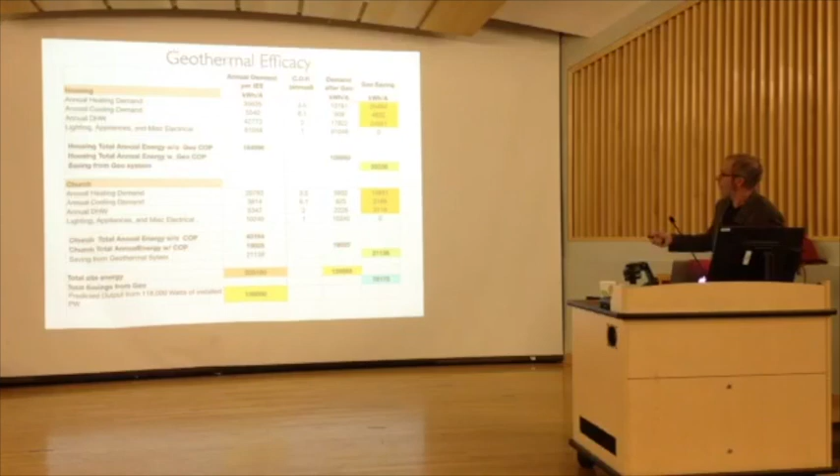If we apply these coefficients of performance, that's like efficiency, we can see that our total heating was 35,000, and we're reducing it to 10,000. The cooling demand is really efficient for cooling, it's trivial. The hot water is being reduced to 17, and the lighting and appliances don't change. So at the end of the day, we've reduced our 205 down to 128, and it works.

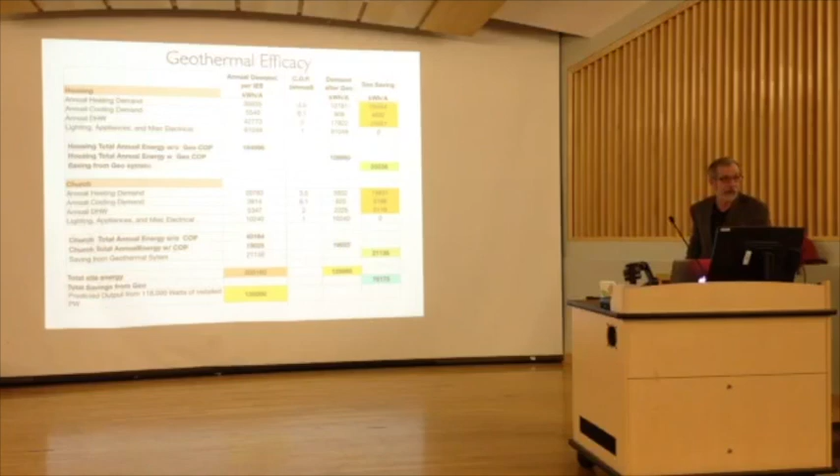So what was the cost per kilowatt hour for this one? For the geothermal? Well, it was about $3 for the cost, and the cost increment to go from an alternate mechanical system.

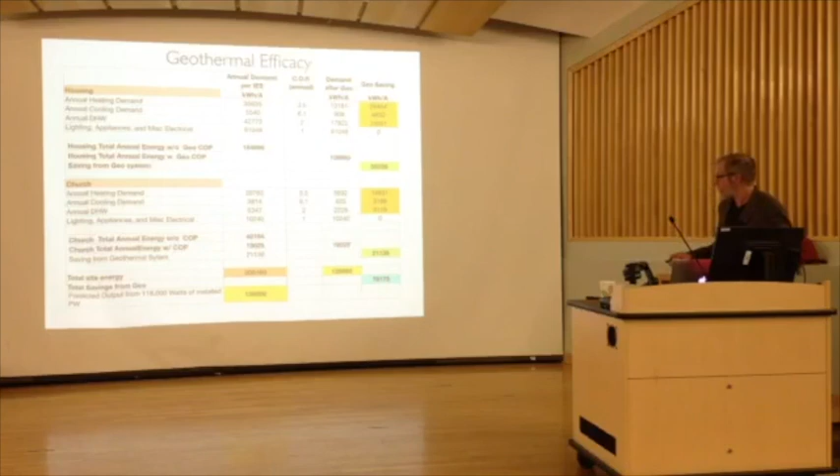One of the things that's really interesting about this building, to me anyway, is if you look at what's left for heating - 10,000 kilowatt hours there, 15 or 5 there - so about 16,000 kilowatt hours out of a total 130 is space conditioning. And 85% of the load in this building, or both these buildings, is just lighting and appliances and domestic hot water. So it completely flips normal buildings on their head.

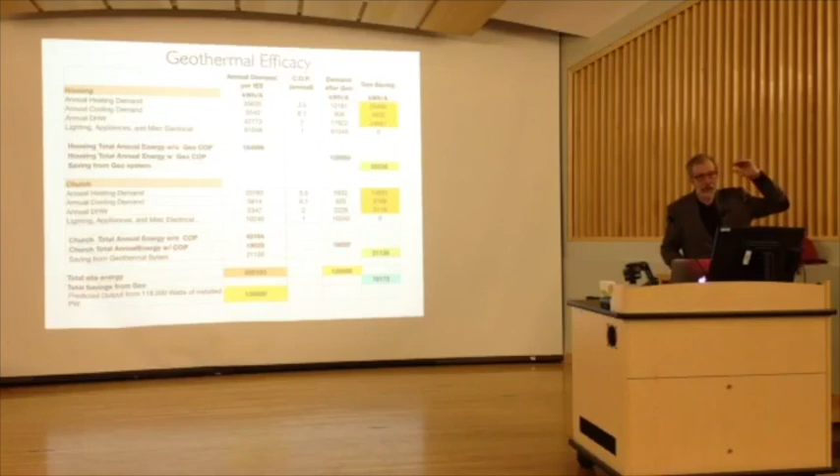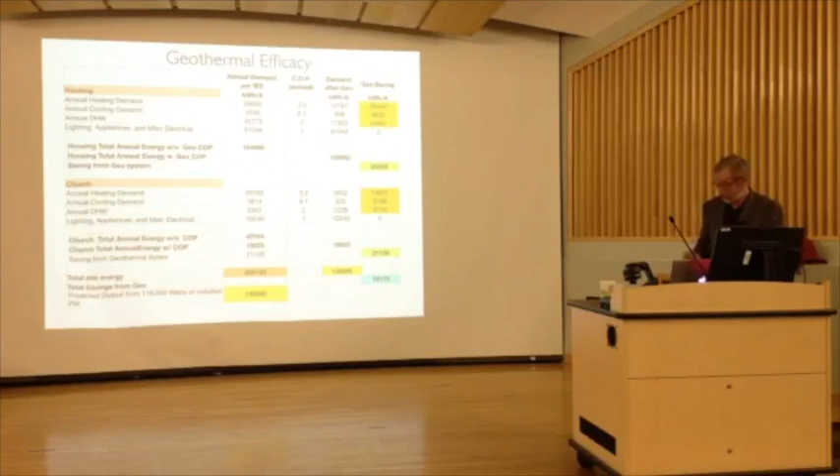It also illustrates that there's kind of a limit. If we'd added another layer of units on top of that, we would have increased the lighting and appliance loads and hot water by half, but we wouldn't have changed the roof area at all, and we would have made a small increase in the heating. So it might be a limit at this efficiency of PV in this kind of configuration. We're going to have to start redefining this and figuring out how we can bring in off-site solar as part of a definition.

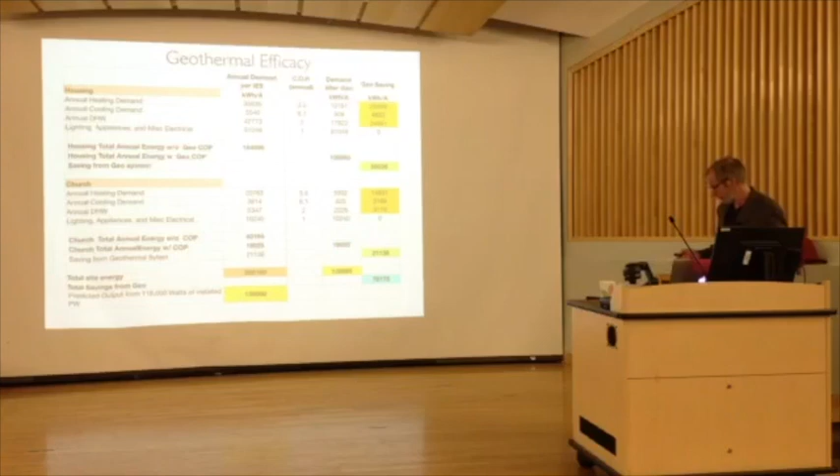So actually, this is just the same slide again. I got it figured out.

So it was an amazing experience, this whole thing. As I said, there's no master plan. We ended up with the congregation doing the right thing, Right at Home did the right thing, the community did the right thing, the school, the daycare, and the Mennonite Center for Newcomers is helping the families adjust to Canadian life, find jobs, learn English, all that kind of stuff. This is exactly what you want to do - if you're going to invite people to live in Canada, you've got to help them get established to be productive Canadians. And these people are crackling, they're really ready to go.

This is such a good feeling in that regard.

One of the other things that was interesting about this was the level of engagement and trust on the project all the way down the line - it was just amazing. We worked way down the process without any kind of a contract with them, and with pretty sketchy budgeting, and the lawyers in the congregation were tearing their hair out, but the people on the committee, there was just a strong bond of trust. We had this, and that went right through the project.

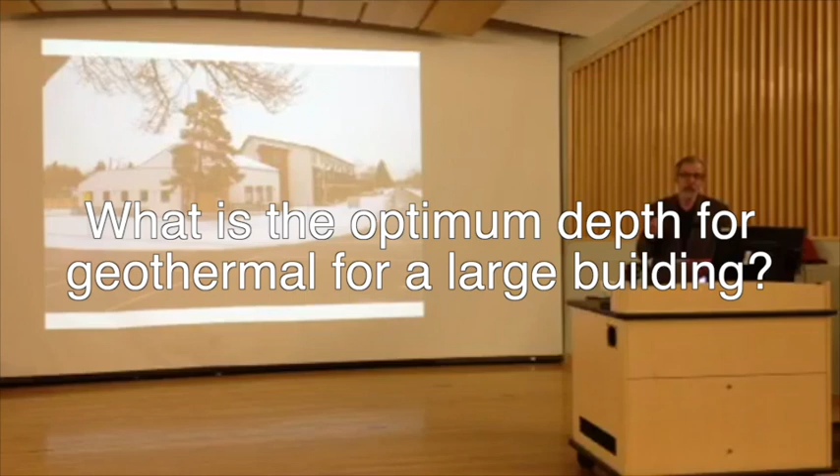I'm going to try and answer this, and then I'll ask Thomas to correct me. With the drilling equipment, 75 meters is kind of an optimum depth, because once you go deeper than that, you're having to pull pipe too much. It's deep enough that you're getting decent performance. For us, it would have been better to drill deeper, because the disruption on site and the cost of trenching those lines together and putting in headers is significant. We ended up, I was tearing my hair out.

I hadn't done any geo on that scale before, and it took over the whole site. If it rained, it looked like World War I with the mud. So deeper and less trenching would have been better, but we worked with Revolve Engineering, and that was their recommendation. They're very cautious, conservative. They originally had 34 holes designed, and then we tested the performance of the first hole while we were still drilling, and based on the performance, we were able to drop it to 33.

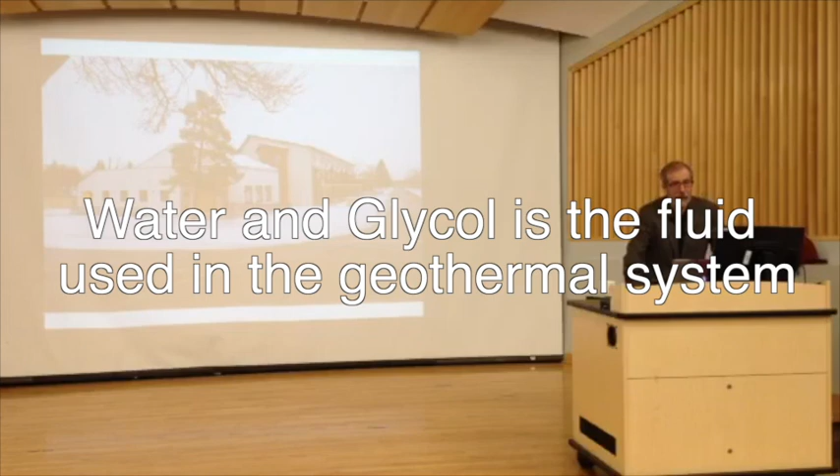You said you're using water and glycol? Yes. And this is used to collect more heat out of the soil, the ground? Well, it's just the heat transfer medium. And the reason for the glycol is that you don't want that water to freeze, because it can be cooled to below zero. But basically you're not taking more heat out because you're using glycol from ground. It's not a very rich mixture.

Here's my question. Is anybody thinking for the far future where you have a whole lot of these types of units close together and you can't put enough heat back into the ground to supply? I'll try and answer that. One of the things that could have reduced the amount of disruption to the site would have been putting the holes close together. Jacob at Revolve would not let us go any closer than 7 meters on center, for exactly the same reason.

So these holes have to treat each other in the same way that they would treat a field around them, essentially, or one next door. So you should be able to put an identical one as long as you go 7 meters away and get the same performance. The interesting thing about this overall system is that because there's so much energy sharing going on in this building, we've designed the geothermal system to be extended from the ground loops all the way throughout both buildings.

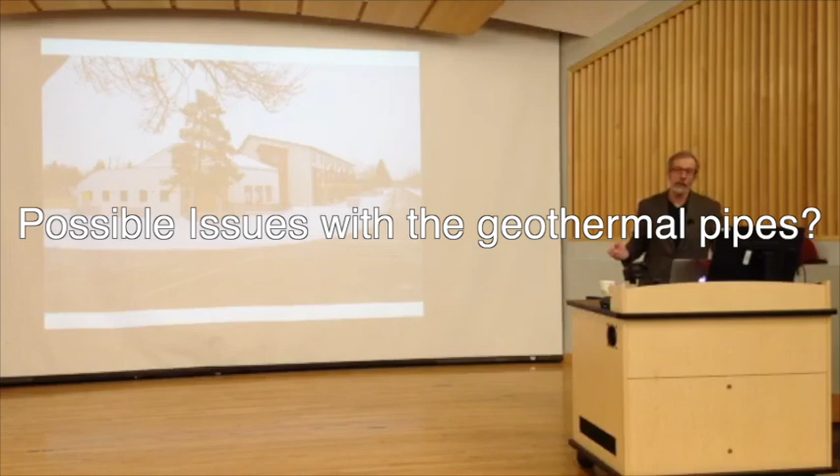So we're very excited to see what the actual performance will be over the next year, to see if there's actually maybe even a bit more cooling dominance than heating dominance. Based off the shared energy loads of these buildings, we're able to go with a bit of a lower temperature demand. There shouldn't be issues because the pipes are polyethylene and they're welded, they're fused. The worst thing for plastic is actually sun, and there just isn't a lot of that down there.

No, it should be pretty much permanent. It's as good as the soldering, really. The cells should last virtually forever. He calls it a rock that makes electricity.

And the batteries? Well, there are no batteries in the system. We're using the grid as a battery, essentially, so any extra energy we produce gets used by the neighbor's fridge, or wherever the nearest place is, or Westmount Mall.

Just curious if there is measurement and verification happening for heating and cooling of the units. If there's measurement and verification.

That's something we're very interested in, and we're just finishing off a proposal to Canada Mortgage and Housing, who have verbally said they're interested in funding a measurement system. New Energy ran Cat 5 cables from the main electrical room to every suite with the hope that we could find some funding to do that. So I think it'd be very interesting to do in a number of respects.

You haven't really addressed the issue of direct gain in terms of passive heating. Your overhangs seem a little unconventional—maybe you could touch on that. How much of the heating is really derived from passive heating in this case?